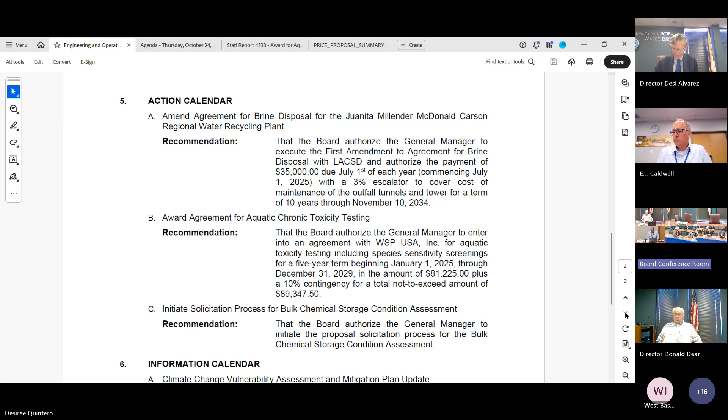So we will move on to the action calendar. The first item is the amending agreement for the Juanita Millender-McDonald Carson Regional Water Recycling Plant. Mr. General Manager, would you like to introduce that item? Yes, happy to do so. This item begins on packet page 3. And for the presentation, we have Uzi Daniel, our Manager of Operations.

Good afternoon, directors. I'd like to present today the amended agreement proposal. From the summary, you can see that in 1999, when we built the facility, the Juanita Millender-McDonald Carson Regional Water Recycling Plant, or JMM as we like to call it, we signed an agreement with the LA County Sanitation Districts.

That was so that we could discharge our brine into their tunnel and go out to the ocean. Just for reference, it does not go to the headworks for treatment, it goes out in the brine. We have to have our own NPDES permit, which the compliance department manages, in order to send that out, which is due every 5 years.

Back in 1999, there was an agreement, which you should see in attachment A, I believe, that was signed that allowed for 30 years. That is now up for renewal. And in good faith, we have been working with the staff at the Sanitation Districts to get a new agreement in place.

The proposed First Amendment, which is in attachment B, which I actually have hot off the press, was approved by their board yesterday. So we have the signed copy here. That agreement would extend ours for up to 10 years, so up until November 10th of 2034.

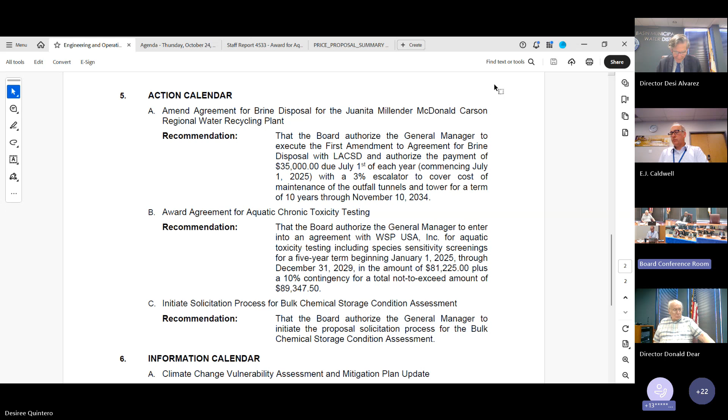And the next item is the awarding of an agreement for aquatic toxicity testing. General manager, could you please introduce that item? Yes, Mr. Chairman, this item begins on packet page 26.

However, I did want to note that yesterday I was able to email you an amended committee report. I believe that staff will be placing this online, it's already actually online, so all members of the public will have access to it. This is an updated memo, and it will be presented by Jamie Malpete, our Water Quality and Environmental Compliance Supervisor.

Good afternoon, directors. As EJ mentioned, the original item is on page 26, but however, please refer to the most updated copies that you have. It is online in the chat for those attending online.

With the renewal of the National Pollutant Discharge Elimination System brine discharge permits for Edward C. Little and for Juanita Millender McDonald Carson Regional Water Recycling Plant by the Regional Water Quality Control Board earlier this year, West Basin Municipal Water District is required to perform aquatic chronic toxicity for both facilities.

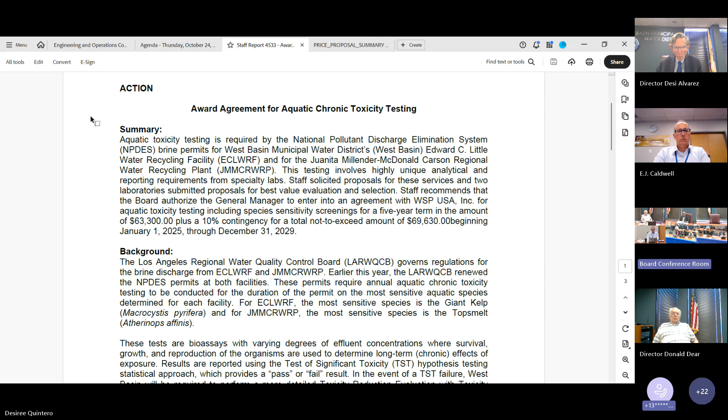Annual chronic toxicity testing needs to be conducted for the duration of the permit on the most sensitive species determined for each facility. For ECL, the most sensitive species is giant kelp. For Carson, the most sensitive species is top smelt.

What is it? Top smelt, Pacific top smelt. So it's a fish. I understand what a smelt is. I thought she just said smell. You eat it all the time. We're not maybe eating this.

In addition to the annual testing, a species sensitivity screening must be performed 18 months prior to each permit renewal in 2029. The screenings are 4 sets of chronic toxicity tests to be completed in a span of 1 year, one set per quarter. The test will be performed on a vertebrate, an invertebrate, and an algal species.

The tests are bioassays with varying degrees of effluent concentrations for survival, growth, and reproduction of the organisms, used to determine long-term or chronic effects of exposure. They require extensive coordination with other agencies and multiple sampling events that last up to 1 week.

Results are reported using the Test of Significant Toxicity, or TST, hypothesis testing statistical approach, which provides a pass or fail result for these tests. In the event of a TST failure, West Basin will be required to perform a more detailed toxicity reduction evaluation, with toxicity identification and evaluation outlined in the initial investigation TRE work plan, which was submitted for the approval of the program.

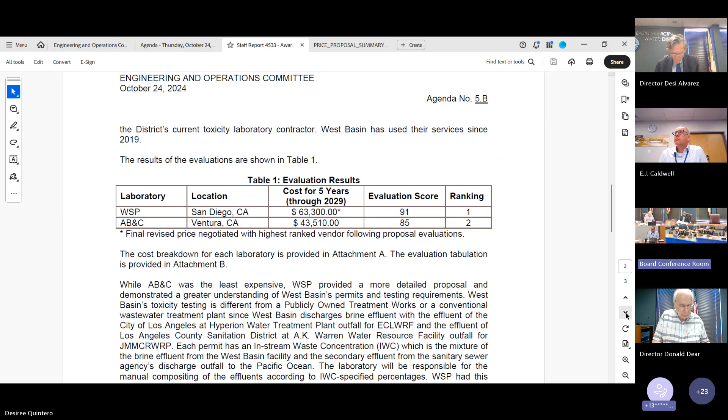Protection of water quality is of the utmost importance to West Basin and its community. Toxicity tests demonstrate the brine discharge into the Pacific Ocean from ECL and Carson will not adversely affect marine life. As this testing is a requirement for West Basin's NPDES permit, failure to perform this testing and report the results will be a violation of regulatory requirements that can result in administrative fines or other enforcement actions.

A request for proposal was issued on September 3rd. After a competitive bidding process, 2 laboratories submitted proposals: Aquatic Bioassay Consulting Laboratories Incorporated, also known as ABC, located in Ventura County, and WSP USA Incorporated, located in San Diego, California. A summary of the final evaluation results is provided in Table 1.

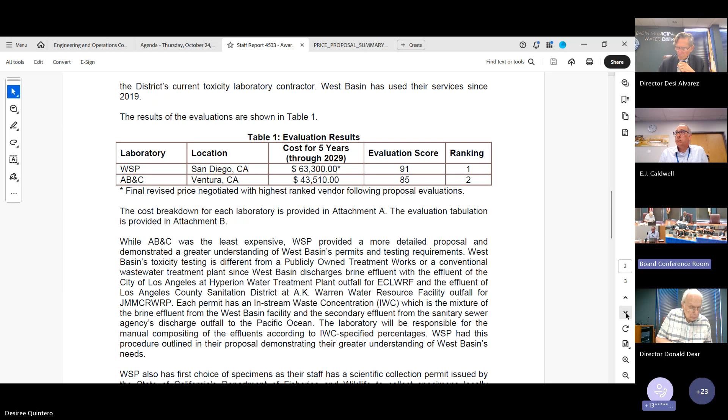Staff recommends utilizing the services of WSP after this competitive bidding process. While ABC was the least expensive, WSP put together a more detailed and tailored proposal, demonstrating a greater understanding of our permits and testing requirements.

This decision was based on the following: first, technical methodology. Our toxicity testing is different from a publicly owned treatment works or conventional wastewater treatment plants, since we discharge our brine effluent with the effluent of City of Los Angeles at Hyperion and with LA County Sanitation Districts at the A.K. Warren Water Resource Facility outfall. Each permit has an in-stream waste concentration, or IWC, which is the mixture of the brine effluent from the West Basin facility and the secondary effluent from the sanitary sewer agency's discharge outfall to the Pacific Ocean. The laboratory will be responsible for the manual compositing of these effluents according to the IWC specified percentages. WSP had this procedure outlined in their proposal and confirmed the methodologies during their interview.

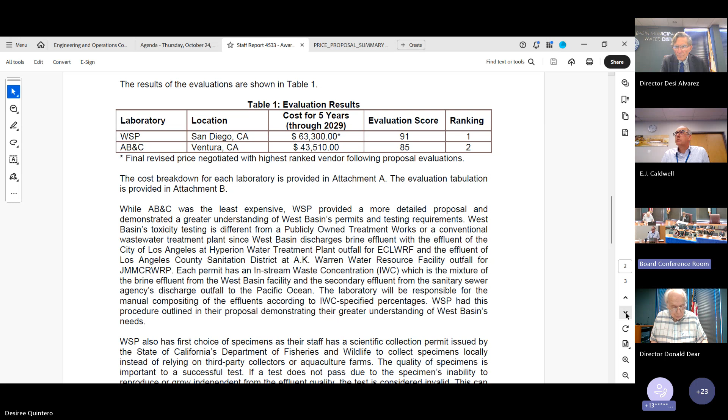The second reason for our decision was reliability. WSP also has first choice of aquatic specimens since their staff has a scientific collection permit, issued by the State of California's Department of Fish and Wildlife, to collect specimens locally instead of relying on third-party collectors or aquaculture farms. The quality of the specimen is important to a successful test. If a test does not pass due to the specimen's inability to reproduce or grow independent from the effluent quality, the test is considered invalid. This can cause inaccurate results, resampling, retesting costs, and possible violations if deadlines are missed.

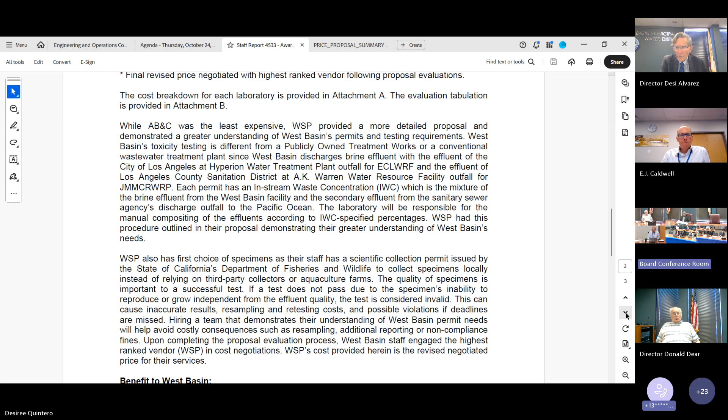I would like to call your attention to the price difference between the two proposals. While there is a $20,000 difference, it's significant. The price was negotiated down about $18,000 less than the original cost that WSP proposed, which was $81,225. Even with the largest price difference, WSP was ranked higher in the evaluation process, which is a testament to the RFP approach of using multiple criteria to determine the best value for West Basin.

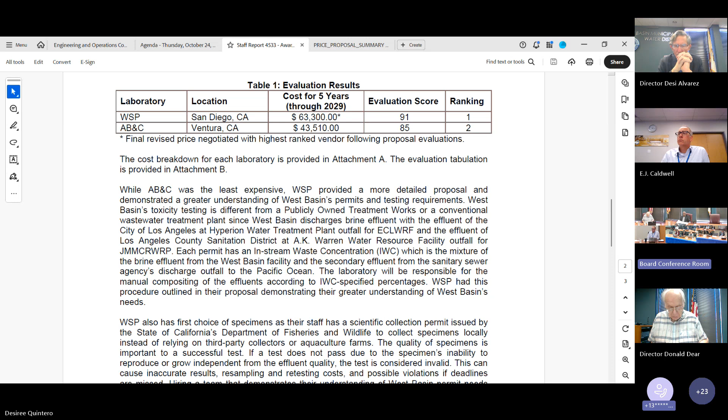I will now read the recommendation: that the board authorize the general manager to enter into an agreement with WSP USA Incorporated for aquatic chronic toxicity testing, including species sensitivity screenings for both facilities, for a 5-year term beginning January 1st, 2025 through December 31st, 2029, in the amount of $63,300 plus a 10% contingency for a total not-to-exceed amount of $69,630. I will be happy to answer any questions you may have at this time.

Director Wood: By chance, was this going to be used with our desalination project? Would they do toxicity testing also for ocean desal?

Yes, they do. I believe we will use this type of testing, though I don't know if we'd use the same company — it's required for most ocean desalination and wastewater treatment plants, anything discharging sewage. But there would be a different set of toxicity tests, identifying probably different species — a sea urchin or an abalone — but a similar type of test, yes. Thank you.

Director Dear: Just want to make sure the new figure is in the record. Is it? It was read into the motion. It's important to note that we did update this — if you look at just the agenda, it has the old figure, but if you look at the updated board memo, it has the updated total amount included in there.

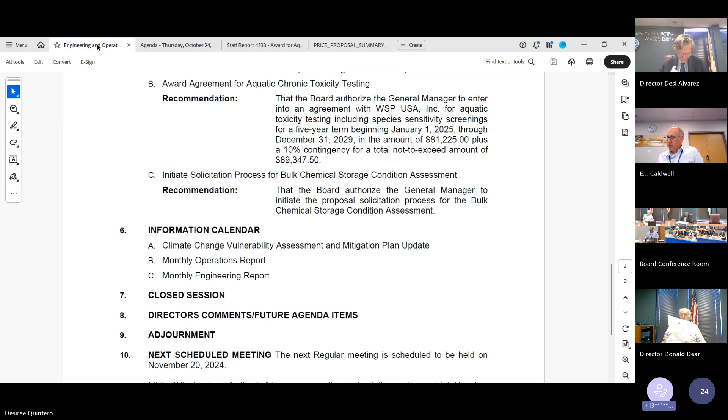So let's move on to the next item, which is to initiate solicitation for bulk chemical storage condition assessment. Yes, Mr. Chairman, this item begins on packet page 41. And for this presentation, we have Camille Castillo, our engineer 2.

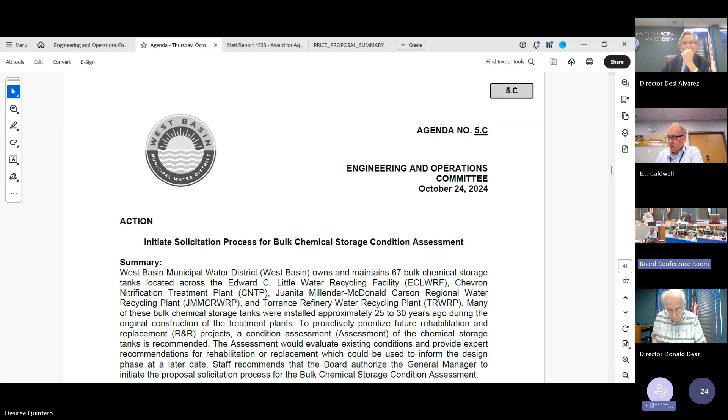Good afternoon, Chairman Alvarez and members of the committee. Today I'm presenting on the action item for the bulk chemical storage assessment project. The project is comprised of inspections of the existing bulk chemical storage tanks located throughout the West Basin facilities, and preparation of a written condition assessment report, which will include the findings and expert rating prioritization for repair or replacement recommendations. The project will allow for proactive prioritization of future chemical tank repair and replacement projects and ensure continued reliable service for customers.

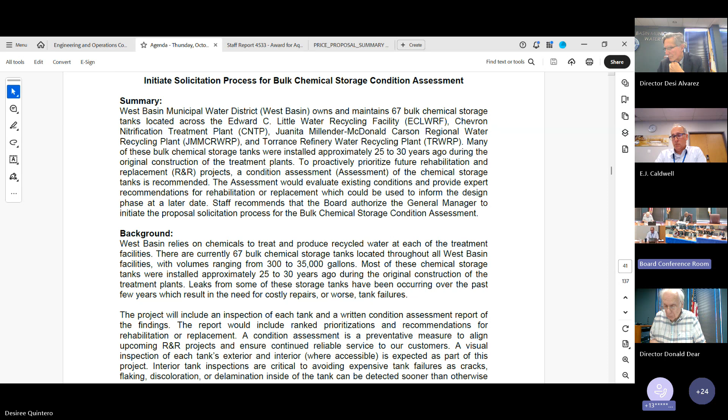The committee may recall this project being presented at the March Engineering and Operations Committee meeting this year. Staff presented the collected asset data for the 67 bulk chemical storage tanks and determined that 47 of these tanks require a condition assessment. Of the 47 tanks, 25 tanks located at our Edward C. Little facility have been prioritized because of, one, available redundancy in the treatment system, which will allow a consultant to perform an internal tank inspection with minimal disruption to recycled water production, and two, for better flexibility in scheduling.

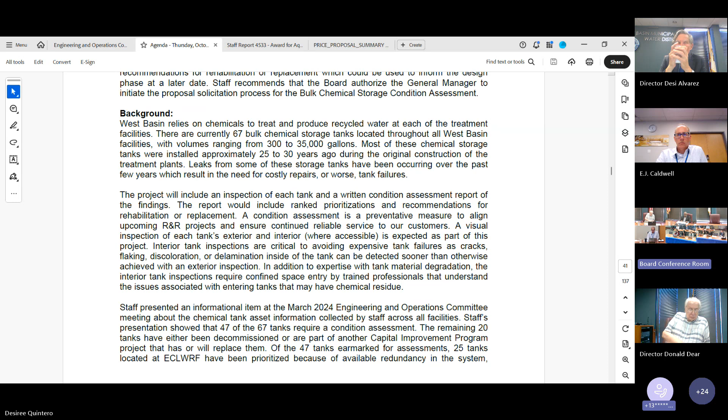Staff has prepared a scope of work for the solicitation of this project as shown in the attachment, and recommends the following: that the board authorize the general manager to initiate the proposal solicitation process for the bulk chemical storage condition assessment. This concludes my action item, and I'm available for any questions you may have. Thank you.

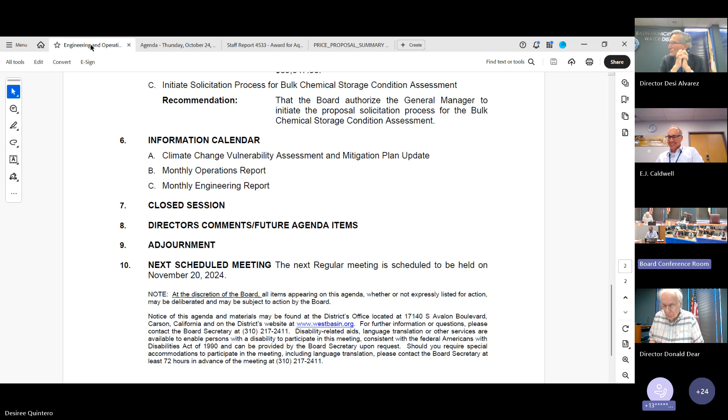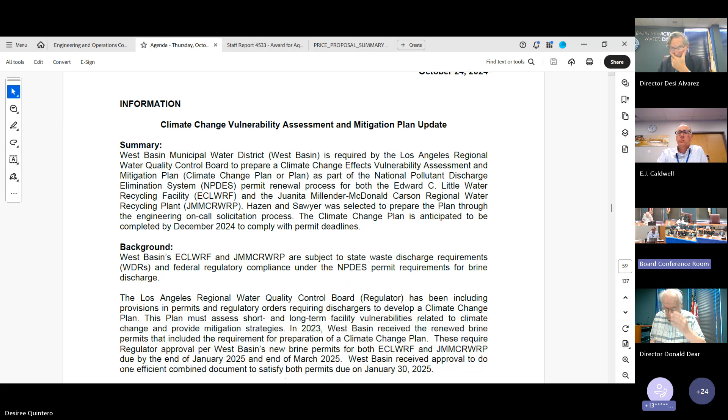Yes, Mr. Manager. Mr. Chairman, this item begins on packet page 59. For this presentation, we have Alejandra Cano Alvarado. This information item is to provide an update on the climate change vulnerability assessment and mitigation plan.

In November 2023, West Basin received the tentative orders by the Los Angeles Regional Water Quality Control Board to incorporate provisions and prepare this plan as a requirement for the National Pollutant Discharge Elimination System, the NPDES, brine renewal for 2 of our facilities, the Edward C. Little Water Recycling Facility at El Segundo, and the Carson facility.

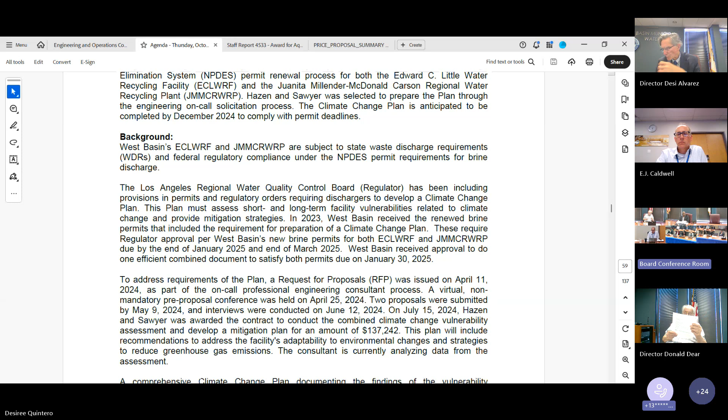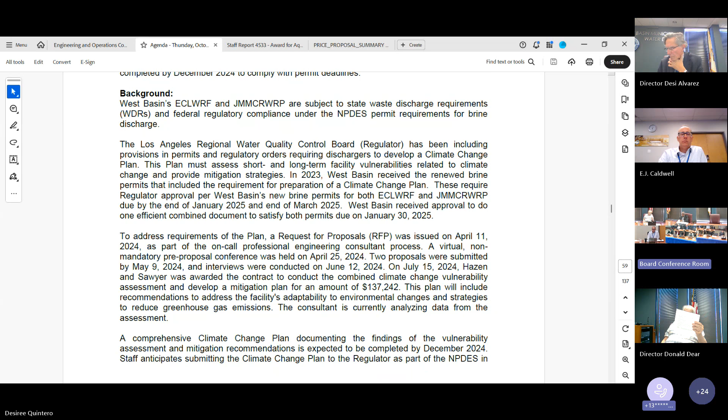With the tentative orders, the Regional Control Board provided a deadline to submit this plan. For ECL, the deadline is by the end of January 2025, and for the JMM plant, it's by March 2025. However, after conversations with the regional board, West Basin received approval to do one efficient combined document that satisfies both permits for both facilities.

This document or plan is due January 30th of next year. To address this requirement and prepare this plan, a request for proposal was issued on April 11 as part of the on-call professional engineer consultant process. A virtual non-mandatory pre-proposal meeting was held on April 25, and 2 proposals were submitted by the deadline on May 9. Interviews with the proposers took place on June 12th of this year.

Following this process, the consultant Hazen and Sawyer was awarded the contract on July 15 to conduct the vulnerability assessment and develop the mitigation plan for both facilities, for the amount of $137,242. The vulnerability assessment, which is the first portion of this project, evaluates the short and long-term vulnerabilities that both facilities may experience as a consequence of climate change.

That could be from extreme heat to sea level rise, flooding, etc. The second portion of this plan is the mitigation plan, which provides recommendations that reduce the vulnerability of the facilities, as well as designed to reduce the greenhouse gas emissions or the carbon footprint resulting from the operations of the ECL and JMM facilities.

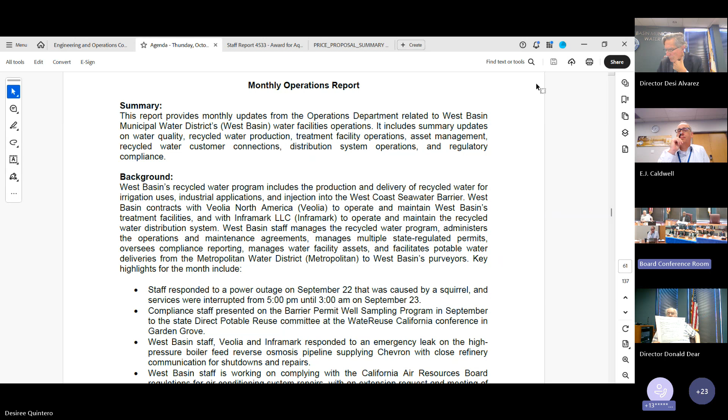Compliance gave a presentation, always a highlight. At Water Reuse, we were asked to give a presentation on our well sampling program, as Water Reuse wants to learn more about some of the requirements for DPR and how some of our programs are run. So that was great. Kudos to staff on that.

We also had a few leaks out in their distribution system, so some of our contract operators help us with those. We'll get a highlight if you choose to see the presentation. We have a few photos of those as well.

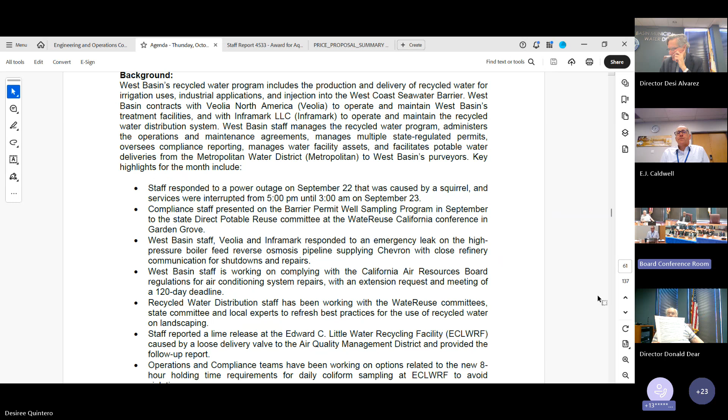Compliance staff has also been working hard. You may notice, maybe in this room not so much, but we have some work going on with the air conditioning. There's a lot of new strict AQMD compliance measures now. So even if we can keep some of our older units running, the material, the Freon, the things that are in there are no longer allowed, or we have to report them. So we have a 120-day deadline to make some of the repairs here and keep that reporting. And we filed with the AQMD, no problems.

We have also been working with a collaborative group with Reuse, DWP, and some outside folks to help. We're really starting to look at our potable water and our recycled water, it's just a different type of water to work with when you're planting. We want to make sure we might start working on guidelines to help people make sure that when they're changing in this arid landscape, what they're planting, restrictions on ornamental, that we're helping them be successful because it's some different techniques. So we're getting involved with that with some of our customers.

We had another reported air quality incident with our lime truck. The connection broke, so we reported that to AQMD, no violations.

And we're also working hard. You'll see lab RFPs coming out. We have a change in holding times on some of our sampling. And we're also trying to work with our labs a lot, since sampling analysis costs as labs begin to shrink, we're having to get subcontracted labs. And so as costs come up, we're going to go out to bid, and that will be presented to the board probably next month. And with that, I'll ask, would you like to see the presentation? I know we always go over that if there's time, and if you'd like to see it, we're happy to present further.

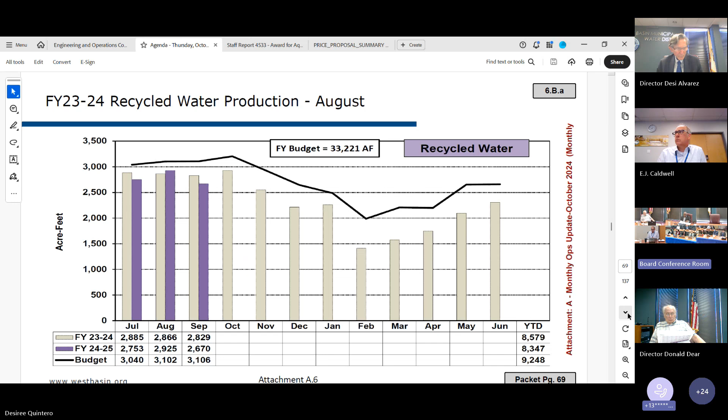If you turn to the next page, this is the breakdown of the different product lines on recycled water. As highlighted, barrier was more than 21% below budget, mainly due to the power outage event.

Torrance low pressure boiler feed was also affected by the power outage, but also had a minor turnaround last month, as did Chevron. The low pressure and high pressure feeds are still going through a minor turnaround and have been below what was budgeted. For your information, at the beginning of the year staff always reach out to the refineries to get a schedule of their turnaround, but these schedules change as refineries have unexpected needs, so they were not accounted for at the beginning of the budget cycle.

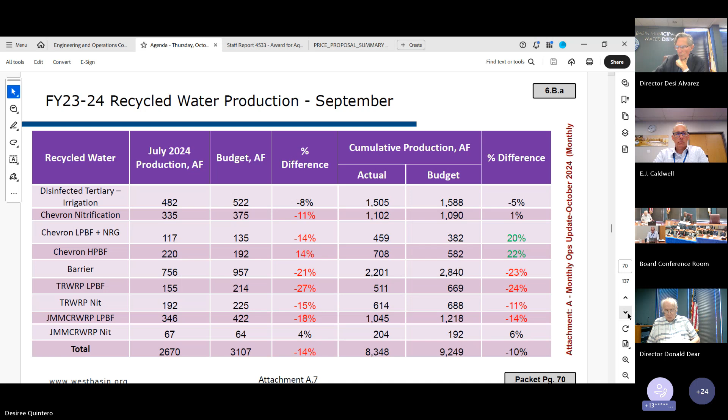So for budget versus actual, overall we are about 10% below budget on total recycled water sales. We're hoping that October, so far very stable, will be closer and bring actual production to budget. Next slide, this compares this year's September to last year's September.

Sales, and as you can see, we're lower in barrier, and again it's on the refinery side. We're also a little low compared to last year due to the power outages.

Susanna, if I can interrupt so you don't have to come back, why are we lower in barrier? You mean the production compared to last year? Yeah, is that because we were asked to supply less water, or is it internal to us? No, it's because of the power outages, we were offline.

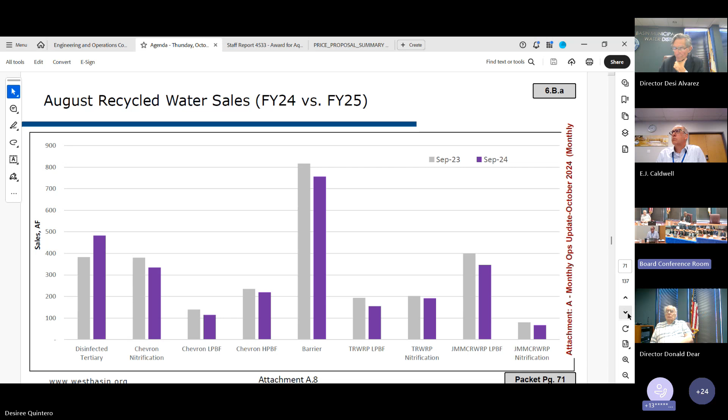And then last year, I think at this time, our phase 5 membranes were still producing adequately well, compared to since probably the latter part of 2023, when we saw a significant decline in phase 5 production. That's when we went to the board to get... Next slide, please.

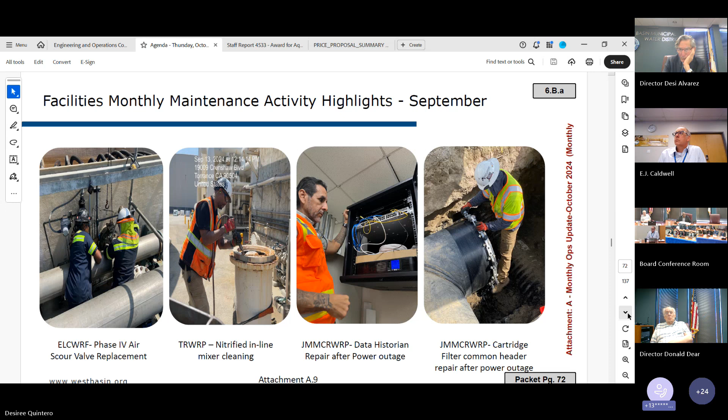Other two items, as shown on the photos: we had a couple of communication issues at JMM because the PLCs are older, and we're working with the capital project team to bring back these communications and resolve these issues as quickly as possible. We have a photo highlighting that work. Last but not least, we also had a cartridge filter leak, the second one at the same location. We'll be bringing a ratification memo to the board next month. We're still trying to gather all the invoices.

To summarize a couple of the emergency responses: the power outage, likely from a squirrel, contributed to blown fuses at the station, and we were able to bring service back online around 2:30 the next day. We've been working closely with SCE over the last few months, so we were able to get a quick response this time. We're very happy with the response.

On September 26th, we discovered a leak, and Infomark was able to identify that it was the high pressure boiler feed versus the low pressure boiler feed, based on the conductivity of the water samples. We worked together with Infomark on the distribution and were able to repair the line and bring service back online the next day.

That concludes this section, then I'll turn it over to Jamie.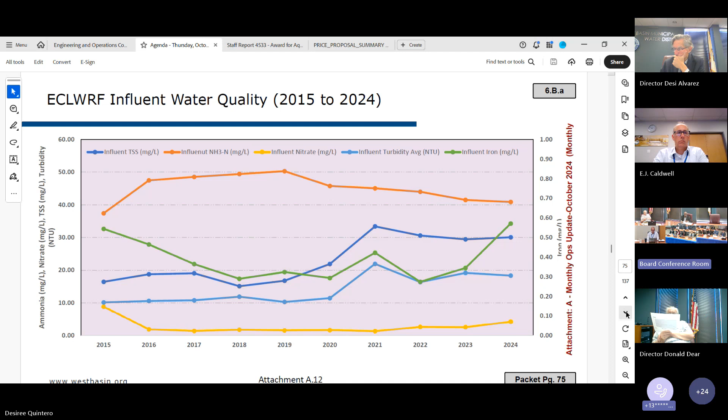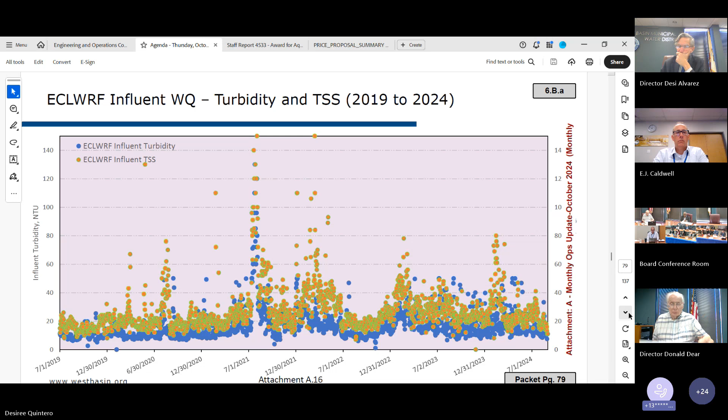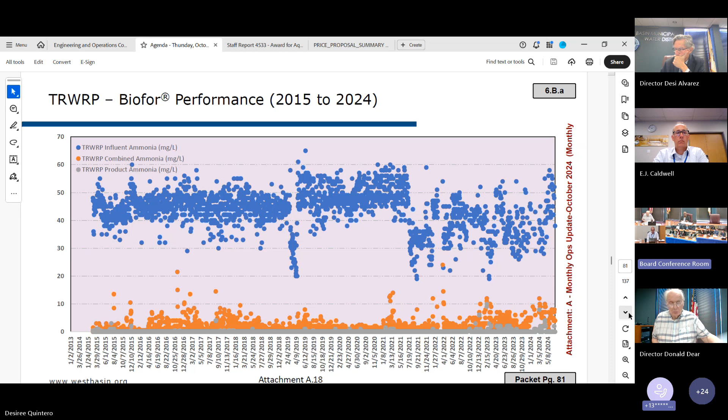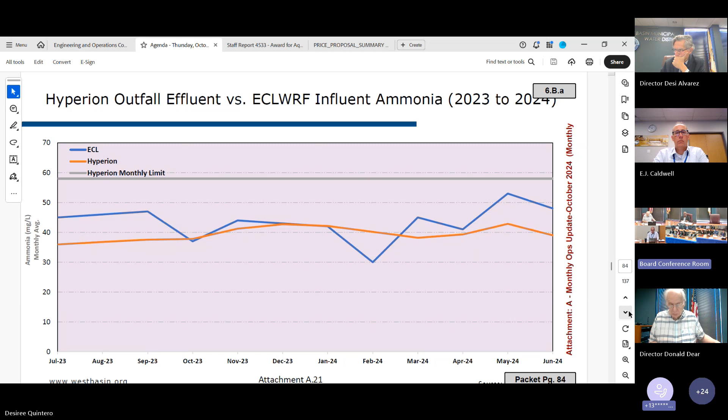Thank you, Suzanne. The next following slides are the water quality slides. No changes—TSS and turbidity have been stabilizing recently. Nothing special to report. Same with the influent versus the ECL influent versus the Hyperion outfall effluent—things have been stabilizing.

This slide is a summary of the environmental compliance activities. Not a lot going on. We've completed our wastewater discharge permit application for our Carson facility, that's with LA County Sanitation District.

Something important I want to bring to your attention is that we do have a violation for oil and grease. We are still investigating this violation. This is a very steep violation—we will be in violation for monthly average, weekly average, and instantaneous max limits. We're trying to determine a source; at this time it's not obvious. There might be a mix-up of samples at the laboratory during sample receiving. We're still working on trying to come to a conclusion, but this is something we'll have to report in our quarterly report to the regional board.

Have you ever had this issue? We had this issue one time before, a year and a half ago—it was at 60 milligrams per liter, so this is a lot more. This is both a concentration-based and mass-based violation.

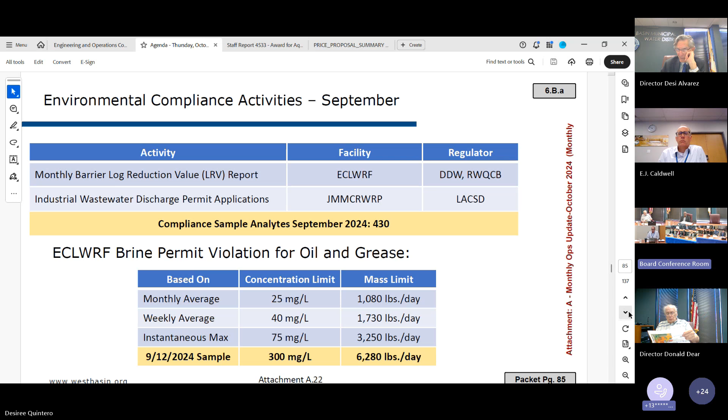Next slide, please. And with that, I will pass it over to Chandler Shields.

Good afternoon. I'm going to be providing some updates for the distribution system. Starting on packet page 87, here's a summary of the O&M implemented during the month of September by Inframark, our distribution operator. I want to highlight 3 distribution system leak repairs that were conducted and performed during the month of September.

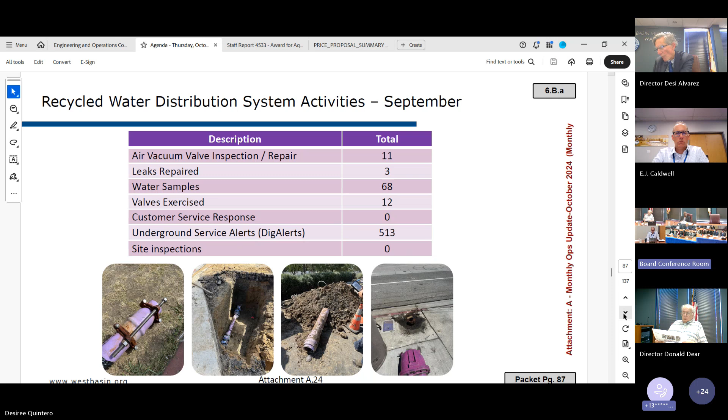We had a leak repair in Gardena on a 4-inch pipeline on September 6th, implemented by Inframark with no issues. We had another pipeline repair on the West Basin 6-inch pipeline within the SoFi Stadium area on September 17th, also implemented without any issues. And the final repair for the month of September was done on the high pressure boiler feed pipeline, which we discussed earlier, on September 26th.

A little bit more information here on page 88 of the packet. On September 26th, the leak on El Segundo Boulevard and Eucalyptus was reported by the city of El Segundo. The leak was about 5 gallons per minute, from a 16-inch high pressure boiler feed pipeline that supplies the Chevron refinery.

Inframark was on site to supervise work that was conducted through the night, and the repair was completed the following morning on September 27th.

Permanent paving for this work is still pending. There's a larger paving area than usual, about 17 feet by 18 feet in terms of the total area that needs to be paved.

The overall final cost for the work may exceed $50,000. If that's the case, we'll return to the board to ratify the cost of the repairs. We currently have one quote from the repair contractor that did the work initially, and Inframark is obtaining additional quotes to compare against that to see if it surpasses that threshold.

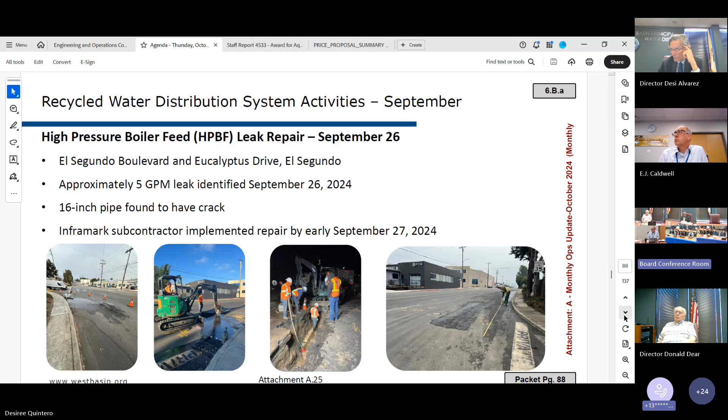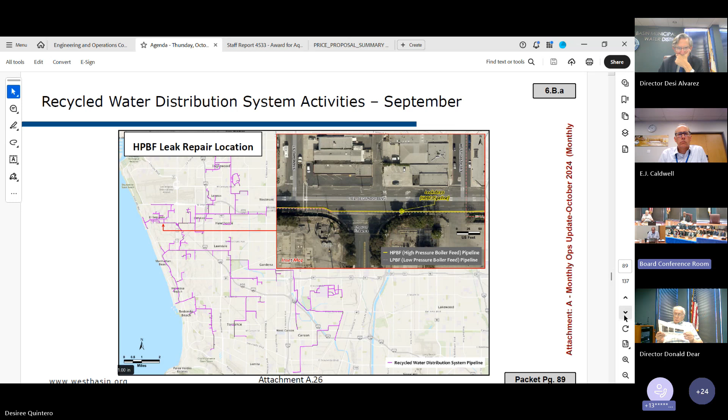Next slide shows the map of the area where the leak was and where the paving will need to be performed.

In terms of large customer sites coming on board relatively soon: Palos Verdes Golf Club, which I'm sure you've been privy to a lot of information about. We've been working with the golf club so they can connect recycled water in early 2025, which would be after the Lago Seco pump station project is complete.

Recycled water demand for this site is approximately 200 acre feet per year. We've been conducting site inspections to help push the site along, personally. The final site inspections for the new on-site pump station they're installing will probably be done in the next month or two.

The Lago Seco pump station is separate from that work. Once that's complete, that's when we plan on connecting the site. That's pretty much it as far as the customer site updates are concerned.

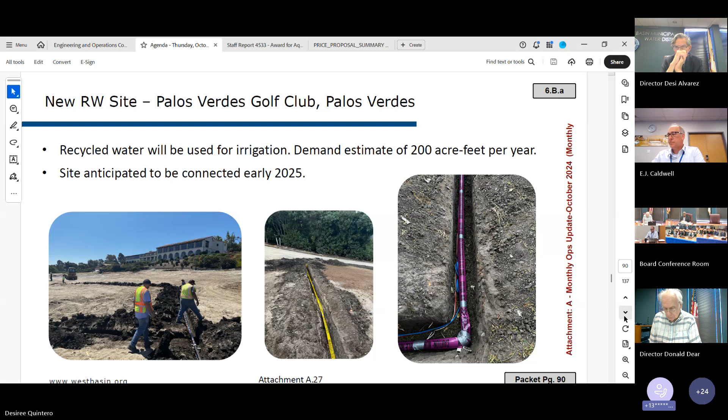Next slide, please. We'll wrap up really quick here with some of our potable customers. Some of these take a little bit of time to get going, but we've been having some really good luck working with our customers.

West Basin 8 is very interesting - we're really trying to help out the city of Lomita. It's a very small water department. The same person who had been there for 30 years is no longer there; they have a new city manager, new manager.

West Basin really is trying with MWD to help out from hydraulic analysis, references to CalWARN, but really what we need to do is get an emergency connection for them. There was one, but when they went to exercise it, it hadn't been exercised in so long that it was completely tuberculated.

We've all seen it on the distribution end. It's a really nice example of teamwork and the beauty of the ethos of the drinking water folks and the water industry in general working on that.

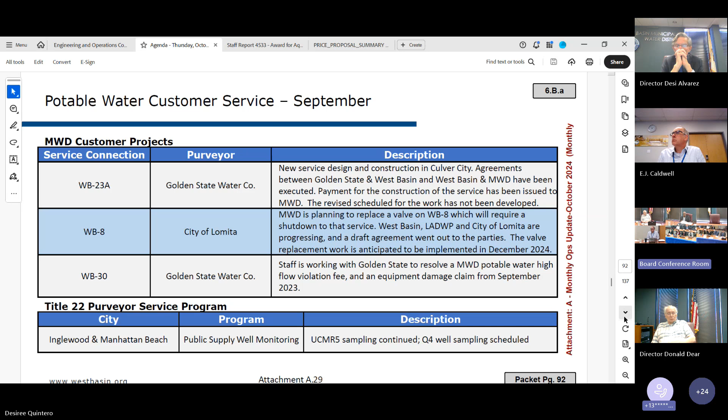If we go to the next slide, continuing with that theme, the shutdown schedule - MWD has a bunch of shutdowns scheduled to do some work. One reason we're working with City of Lomita is MWD will be replacing a valve so they're not as vulnerable if one went out, with a different valve and a second valve. That's why they need the temporary backup while they do that.

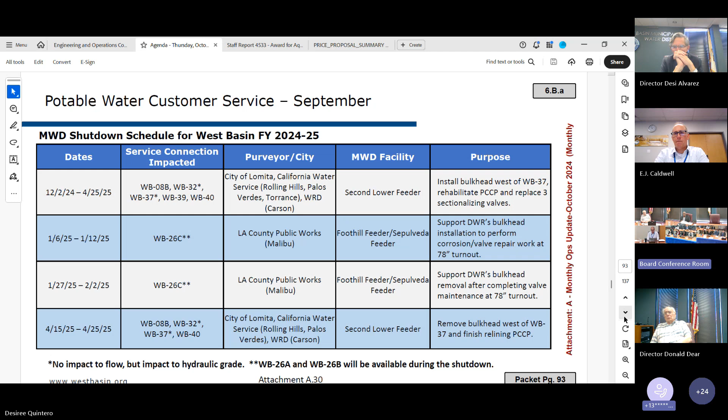There's a number of other impacts to some of our customers. That said, we've been able to schedule general meetings and individual meetings to assure that all of our purveyors and customers are accommodated. It's been a great group effort and adjustments have been made. Right now, it seems like this scheduled shutdown will occur with very little or no impact.

Next slide might be it. Oh, then we go on to some of our sales. These are also probably recognizable from the finance committee - you can see there in September we had an increase in potable water sales, often the result of those giant heat waves at the end of July and September. We'll see that impacted in the monthly bills.

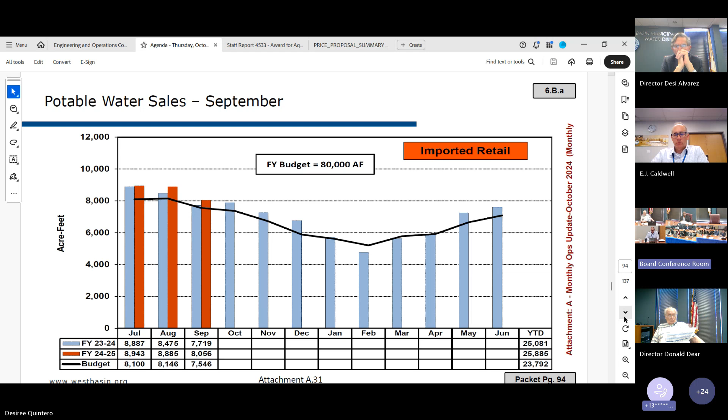The next slide - oh, and then that's it. In your packet, you'll see all the different recycled water connections as usual, those are in there. If you have any questions, feel free to let us know. That's it, thank you.

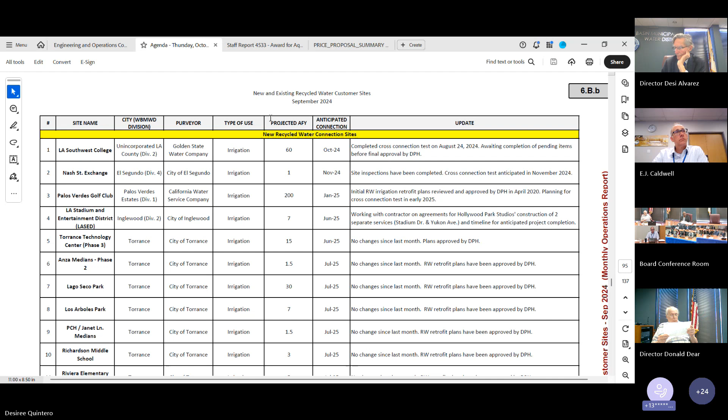So the last item up is the monthly engineering report.

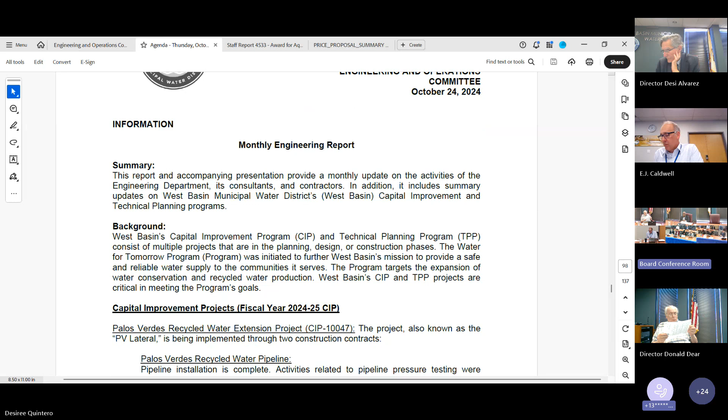Mr. Chairman, this item begins on packet page 98, and we have a team here to present these items. It'll be led off by Barkin Masurlian, our Executive Manager of Engineering Operations, and we also have Veronica Gobert, our Engineering Supervisor, and John Benner.

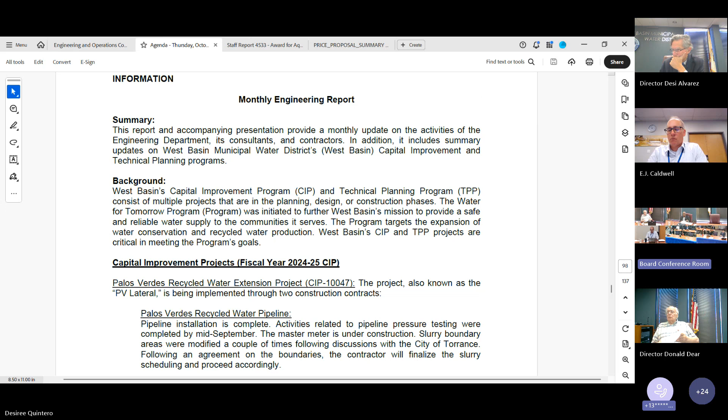Good afternoon, directors. The report starts on packet page 98, but we can go to packet page 102 for an overview of what's in the presentation. As usual, we'll start with a look ahead of what's coming up in November, the E&O committee, and then updates on four of the projects.

I'll just ask the committee to confirm whether we go ahead and provide the full presentation or just look it over. Would the board like to proceed? Quick overview. Okay.

So if we can go to the look ahead at page 104. We have received an assessment report on our elevators. We are considering some of the options, so we're hoping to come in with some recommendations next month on a couple options for us to implement.

Also, the solids handling improvement project - we have pre-procured some items in the past. We're coming back again next month for some more.

And the DCS replacement project, we are moving along as planned, and we plan on issuing the progressive design build RFP in early December. To do that, we have to get the board's approval next month, so we'll come back for that approval.